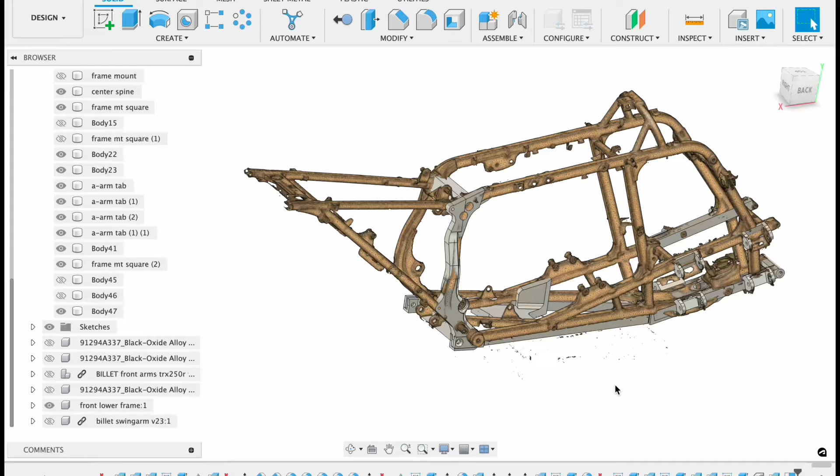In this video, I'm actually going to work on the subframe. I've been thinking about this and deciding what direction I want to go in. You guys saw the billet swing arm in the last video, and I thought it would make sense to work back to front.

So guys, we're gonna drop a subframe. This is gonna be a multi-piece billet and slightly fabricated design. We're gonna have aluminum tubing with billet components that get TIG welded together, so it's gonna be a pretty cool design.

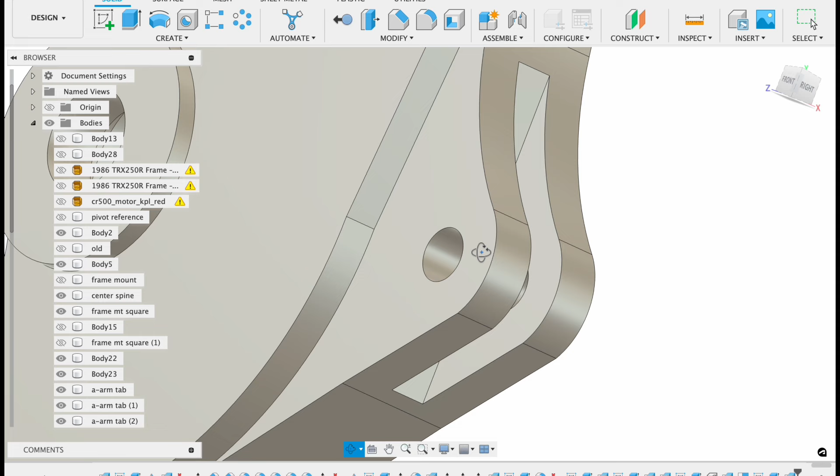My goal here is to have a minimal amount of pieces when we go to do the final welding. So everything is gonna be as much CNC machining as possible in terms of all the fitments and the pieces that intersect the tubing together. I'm pretty excited to start drawing this.

The first step is getting a mounting location on the side of the frame tube. This is what I'm calling the right side frame pivot area of the frame. You guys can see I already went ahead and put a little bit of a slit in there.

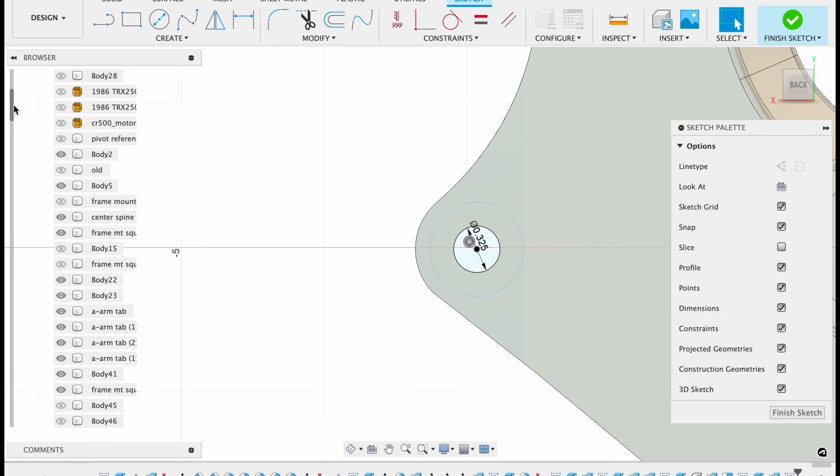Now I'm going to machine that by using a slitting saw. That would typically be a tough feature to machine, but when the part's laid on its side in the mill, I can easily cut that with a slitting saw.

You guys can see I already started sketching on that flat plane, which is inside that mounting area. I'm just going to take the line tool in Fusion and kind of overlay it over the stock frame. I'm going to try to get an angle established.

I want to make a billet piece that would get welded to the end of the subframe. If you guys look at all the modern dirt bike subframes, it's actually genius the way they do it, so it's going to be kind of similar to the way that stuff is made.

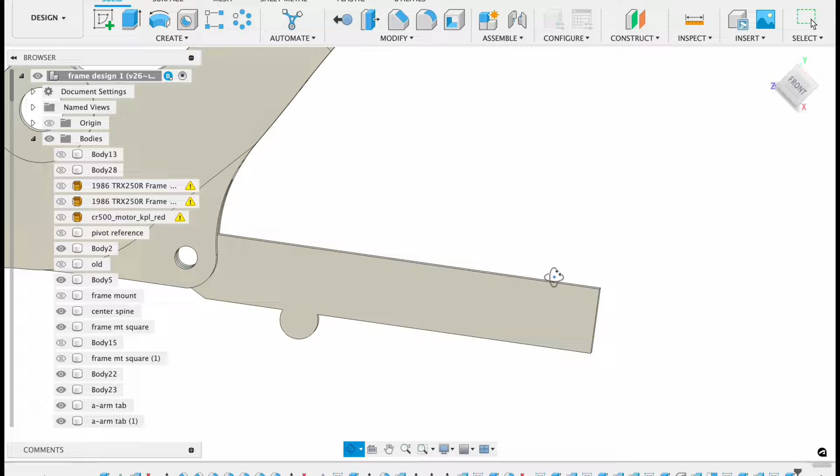If you look that up, you'll see that all the brands pretty much have billet fittings that get welded to an aluminum tube. Now I'm going to take that a step above, and a lot of this subframe is going to be CNC machined. So right here, we've got the mount that's kind of roughed in.

It's just a skinny version of what it's going to be, and you can see I'm pulling that around the frame. I did a little bit of a cutout so it fits into a little bit of a pocket.

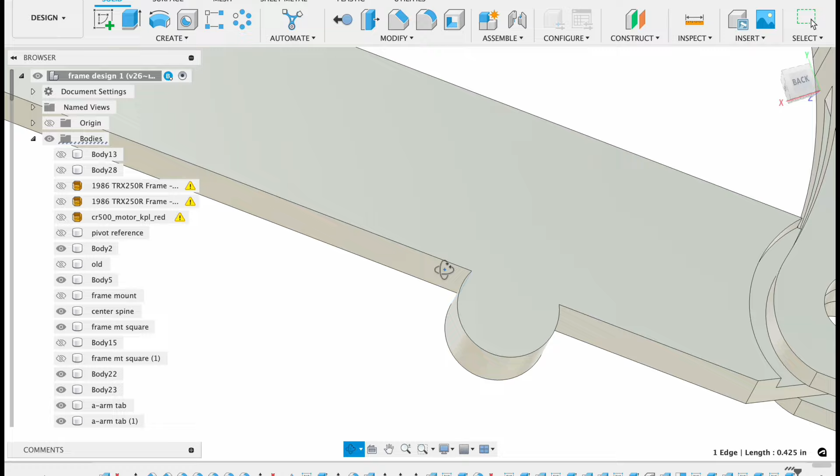Now right here, guys, you can see I'm adding the rear brake master cylinder mount. We're going to have this tab coming off the bottom, and these are going to be 6mm thread, so it's not a super large bracket, but I am going to beef it up a little bit larger in diameter than what the steel piece would have been.

Aluminum is very strong, but you do want to oversize it a little bit versus what the size would be if it was a steel part. So you're going to notice a lot of the fittings are going to appear oversized, and that's just for strength. You really got to think about how you're going to build all your parts.

It's real easy to make them weak, and it's real easy to actually overbuild them. So there's a lot of thought process that goes into all this stuff.

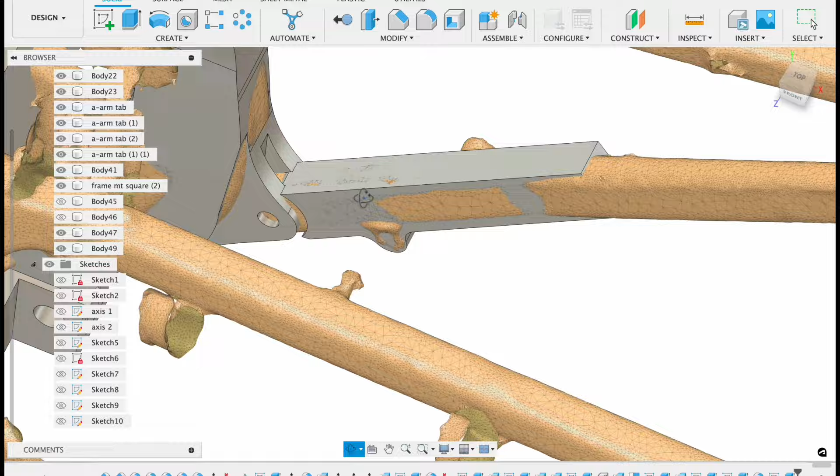You're going to see through this video, I'm going to be changing the designs up quite a bit. And of course, once we do final machining and final testing, there's going to be more and more tweaks that happen with these parts.

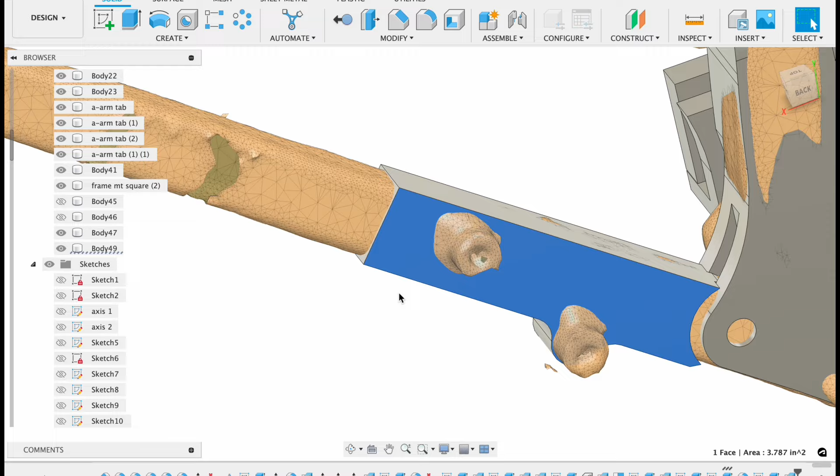All right, so right here, instead of doing bent subframe tubes, I'm actually going to angle the fittings. I'm going to have a little bit of a standoff that comes off the fitting, and the tube is going to slip over it. I'm going to put that part at an angle because I don't want to be bending any of these tubes. I want to keep them as strong as possible.

The less bends we do, the stronger it's going to be. I'm actually planning on offering round tube and square tube. Believe it or not, I actually like the look of the square tubing. It's actually a little bit nicer to set up with the fixtures and all that. I'm excited to experiment with both styles, so you guys are going to see me rocking some square tubing in these designs.

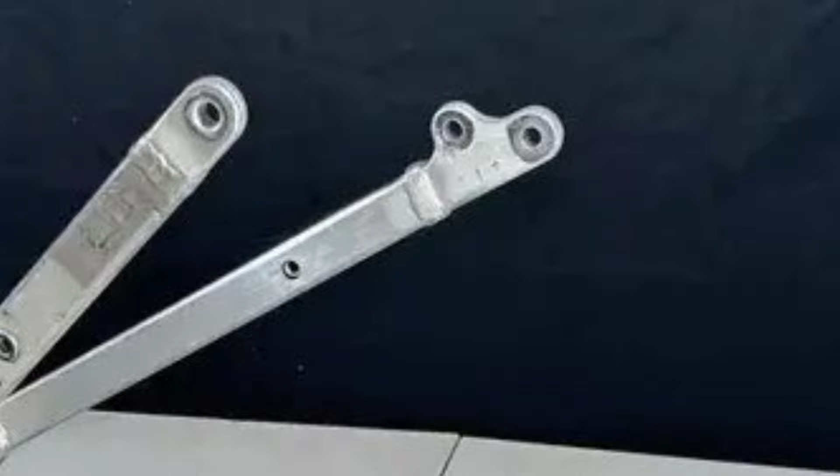Here you can see a Honda CRF450 subframe, a picture I found on eBay. It gives you an idea of what I'm going for with the aluminum fittings that get welded onto some square tubing. I'm inspired by that because a lot of what I do is dirt bike stuff. You guys have seen what we've done over the last handful of years with all the TRX subframes, and I've really been having my hands on all the brand new dirt bikes and new technology in this industry. So we're gonna go with that.

I'm still working on this bracket. I spent way too much time on it, but it's honestly the foundation of the subframe. It's where it mounts to the frame itself, and it's where all the strength is actually going to be.

I'm doing some final tweaks on it. This is stuff I could have probably done at the end, but I just wanted to get a mental visual of the design. Sometimes I get stuck and I'll just start tweaking something until I'm happy with how it looks, and once I feel happy with it, I kind of just move on.

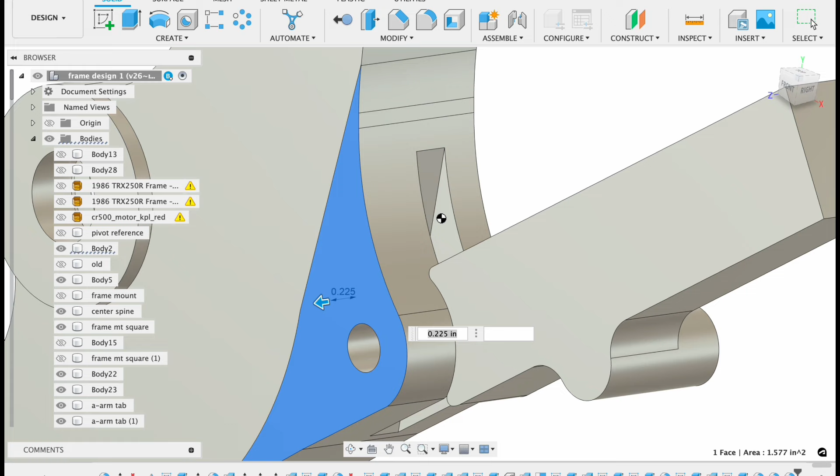I also like to bounce around once in a while. If I start getting stumped on what direction I want to go in, or I have to think about it for a couple hours, I'll sometimes take a break and go back to it. This has been a combination of about a week of on and off the computer as I had extra spare time.

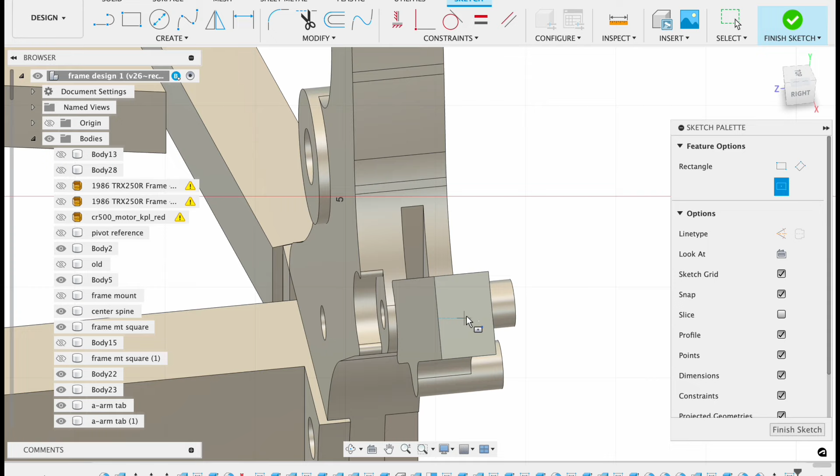But I did spend some time on that day late at night. I was on this computer doodling on this bracket here, so it's pretty fun to do. Like I said, sometimes you just gotta step away from the computer and clear your head and get back to it when you get the idea.

So like I was saying earlier, we have a little bit of a standoff going on this bracket. When you draw in Fusion, sometimes stuff isn't at the correct angle. You're not going to really nail it right away, so it's really trial and error. I set, I believe, a 5-degree angle, and I ended up tweaking it a couple times just to get the tube where I wanted it.

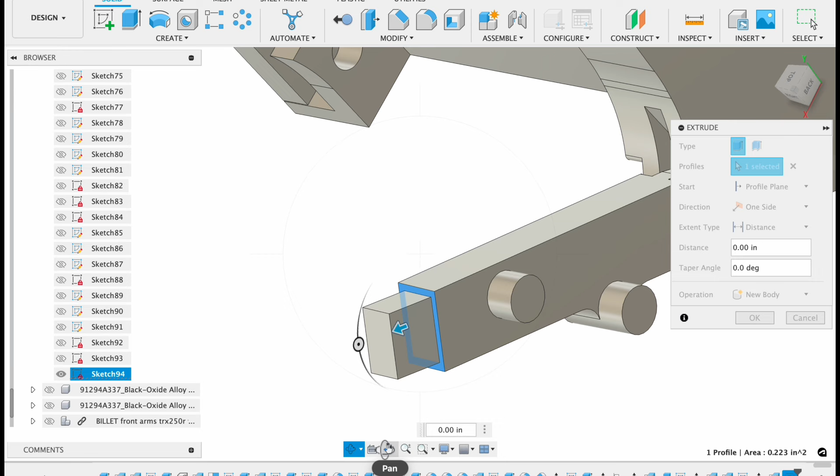I basically just set the angle and then started drawing a tube and dragged it over the OEM frame, and you guys are going to see that coming up here in a second. So there's the start of a tube. Now I just need to actually line the frame up and see how it looks. This was after probably the 3rd or 4th try, so I finally got it.

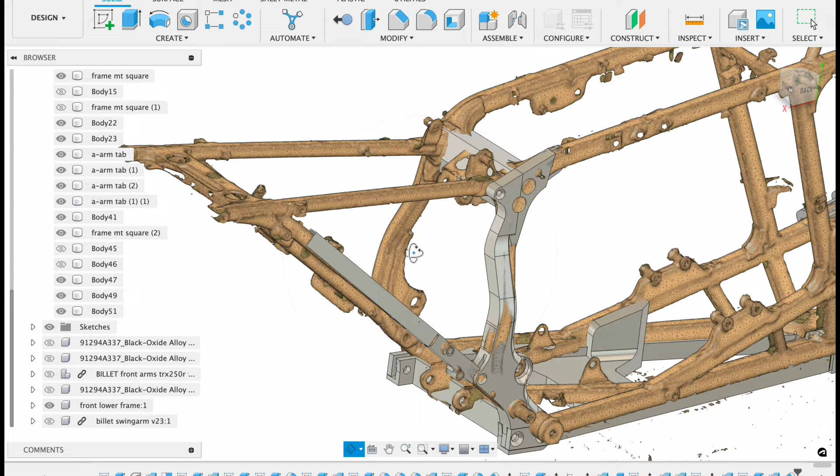It's cool because this image, as you guys are going to see, is going to get mirrored over to the other side. We've got a lot of components and bodies in this drawing, there's also going on almost 200 sketches now, which is pretty freaking wild. But yeah, it's a lot of work, there's a lot of getting stuff to line up. So right there, I'm just doing a mirror of both sides. It's going to give us a pretty cool visual to actually see what it's going to look like.

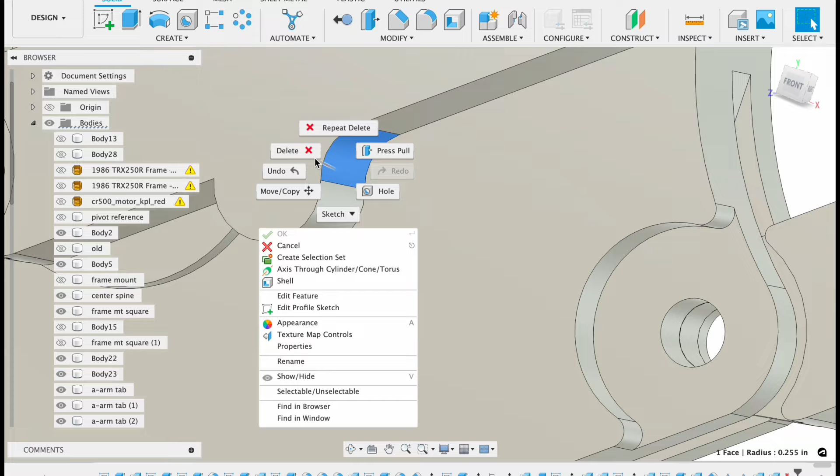It's always nice when you're drawing knowing that you're going to get it lined up on the opposite side, so you only have to do the work once and then do some final tweaks. So instead of redrawing that bracket, I actually just mirrored the lower bracket. Now we're going to remove the brake master cylinder mounts off of that bracket because obviously there isn't one on that side, only on the right side, not the left. So I'm just cleaning that up, removing a couple of features, and now that's a separate body on that side that's ready to go.

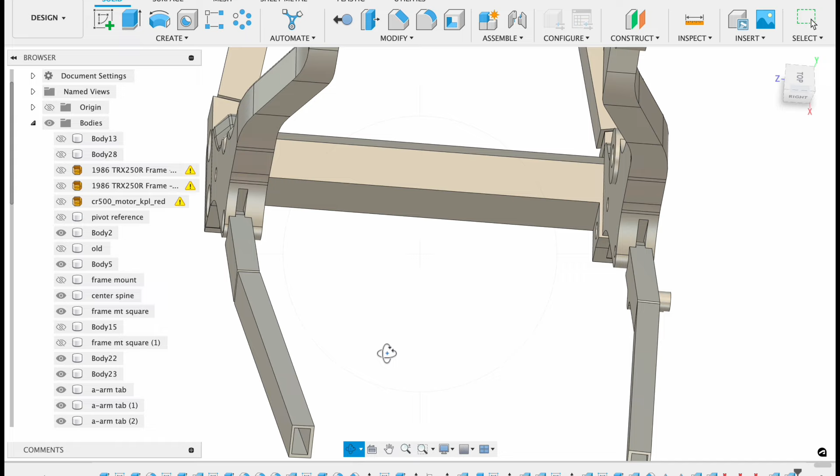Now I decided to actually adjust the frame. I wanted to thicken that back up, and I'm actually going to thread it. Originally I was going to put a nut on there, but I think the threads are going to be just fine. We do a form tap. Our threads are super strong with the way we actually machine them. I haven't ever had any issues with threads pulling on our aluminum parts. We're also going to use high quality hardware, and it's going to be super strong.

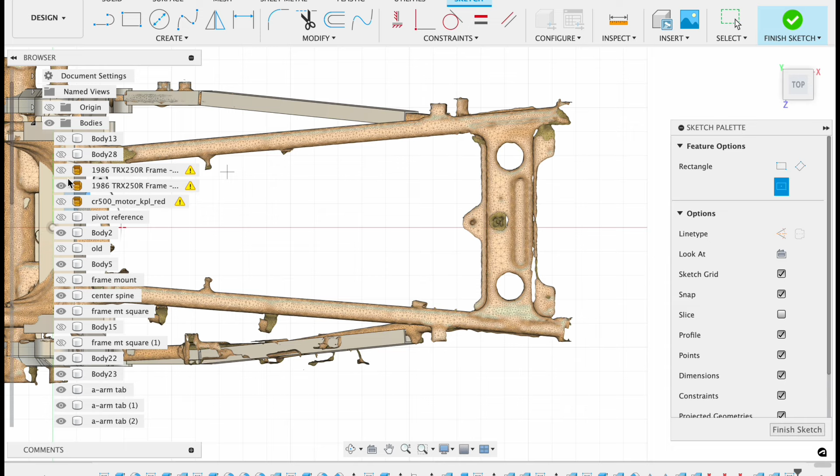It's not good, but I'm just going to get some hole locations, and again, this stuff's all going to be final measured in real life. This scan, I believe, was a 50,000 resolution. I actually left it kind of rough on purpose because if this thing was any larger of a file, I probably would be having issues with my computer. I'm actually doing this on a small Apple laptop, just kind of chilling in my chair at home at night, and it works. It works, guys. It lets me do this at night and do it in my free time without being on the shop computer.

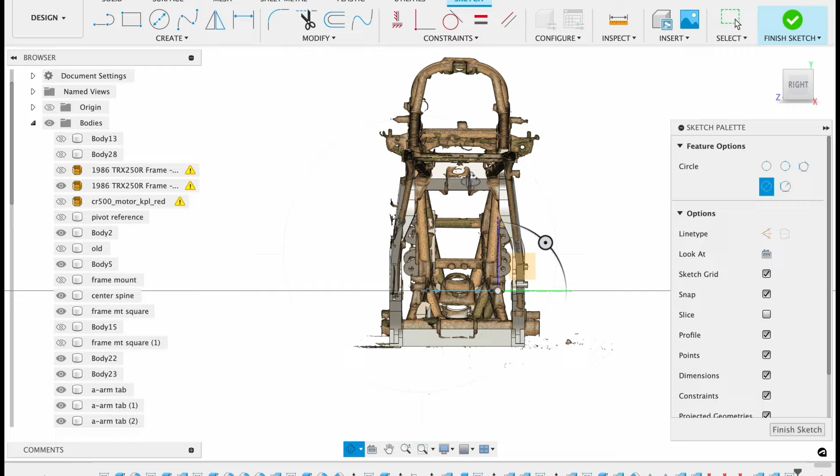So again, the subframe's bent. I can see it. It's pretty awful, kind of funny, but it's okay, we're going to make it work. So as I'm drawing this, it's actually going to look crooked, but just keep in mind we're drawing everything straight and on center in the CAD software, and we actually do have a bent subframe in real life. So I'm going to move that all around so it's perfectly centered to the drawing.

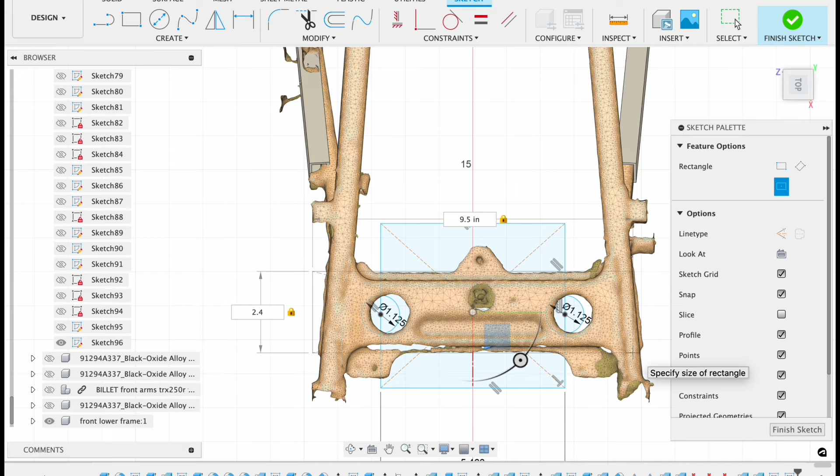So now we're working on the rear plate on the subframe. I'm starting out, I believe, with a 3/4 inch piece, and we're going to tweak it from there. So it doesn't look like much yet. I think I spent almost a couple hours just on that one piece, which was pretty wild.

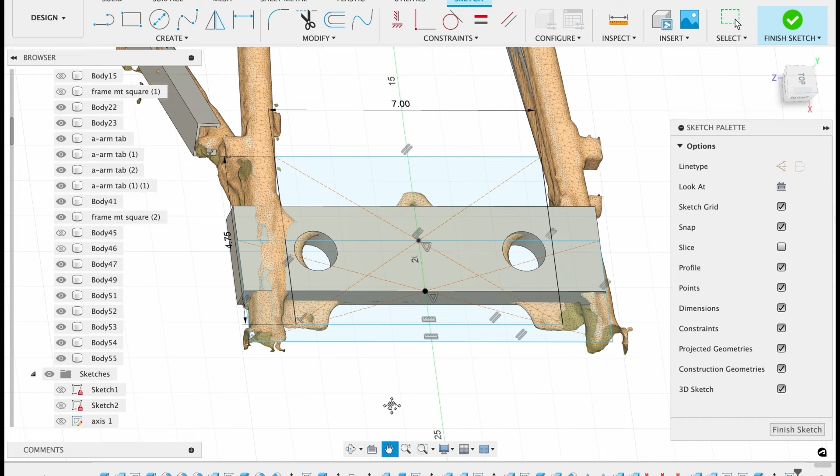And I'm probably not done, so you're going to see me do a bunch of tweaks. Even at the end of this video, you guys might see how this comes out, and then in the next video you might go, oh crap, he made a bunch of changes. I'll try to remember to document some of that stuff if I do tweak anything significant. If it's just small stuff like finishing edges and small little features, I'm probably not going to video all that, or I'll bore you guys to death for hours just talking about it.

But again, the goal here is going to be to have removable brackets. So the airbox tab that you see, that's not actually going to be added on yet in this video, but I will have a removable bracket at the end so that we can do some custom airboxes, everything from maybe an airbox for no-link or an airbox for OEM.

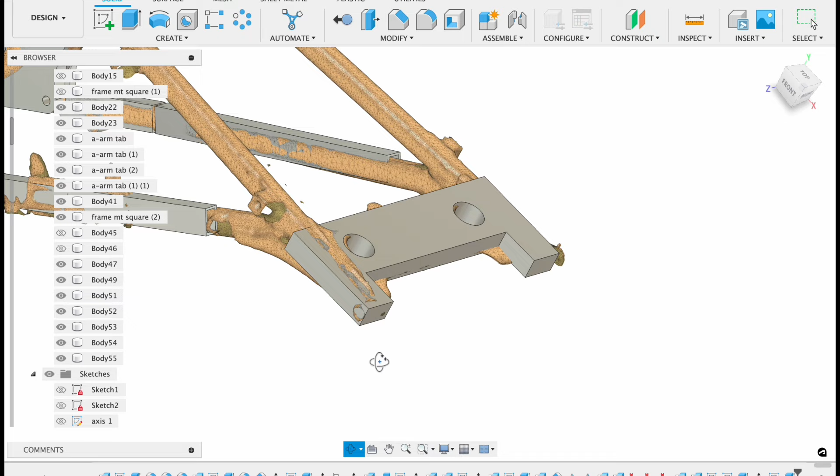I believe this chassis is probably going to end up as a no-link. I had a handful of Lone Star, JRD, and a couple others in the past that had the no-link setup, and it worked really well. I also built one a few years ago for a good customer of mine named Don. He had the Roll Design quad that, believe it or not, made our YouTube channel take off. That was one of the Project 250R series that we did. That was a super fun build.

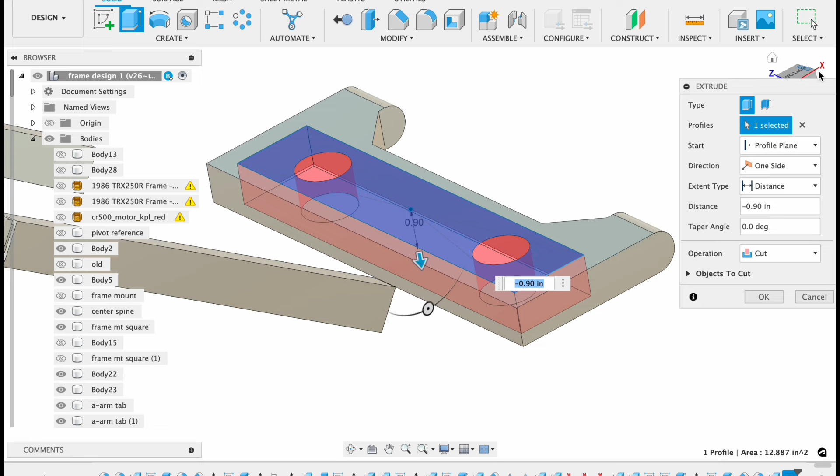He had the stock upper bracket for the shock mount going down to the no-link swing arm, so the shock was a little bit shorter than if the frame would have actually been modified. So the goal here is going to be to bring the shock mount up and back and then run hopefully an 18.5-inch shock. My goal is to actually be about 17.5 to 18.5 inches for the no-link rear shock on this custom frame.

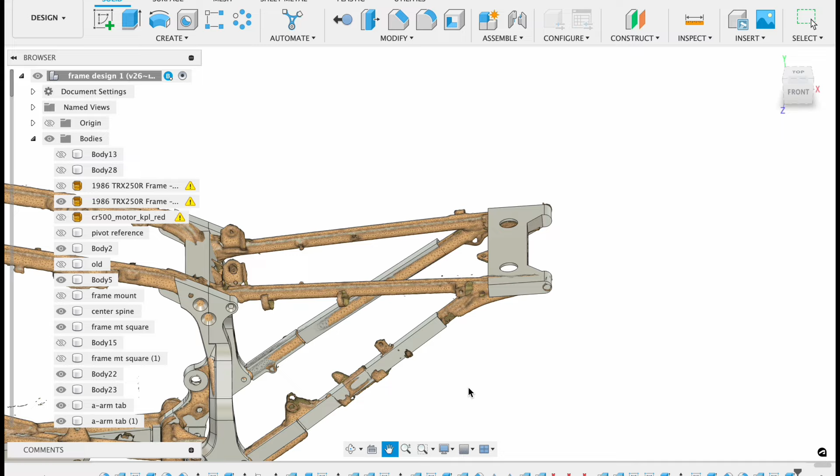So, and again, it's unlimited. If we want to do a stock linkage, we can, but I honestly don't see the point because I've always had them, always tried different ones. We've run the CR500 link, no link, all the modern 450 quads, and yeah, I'm definitely gonna try to go no link on this build.

So yeah, guys, here I am, kind of just staring at this thing, and I'm hitting the old save button because it means I'm getting happy if I start hitting save. Little tip in Fusion: don't trust it. Hit that save button as much as you can.

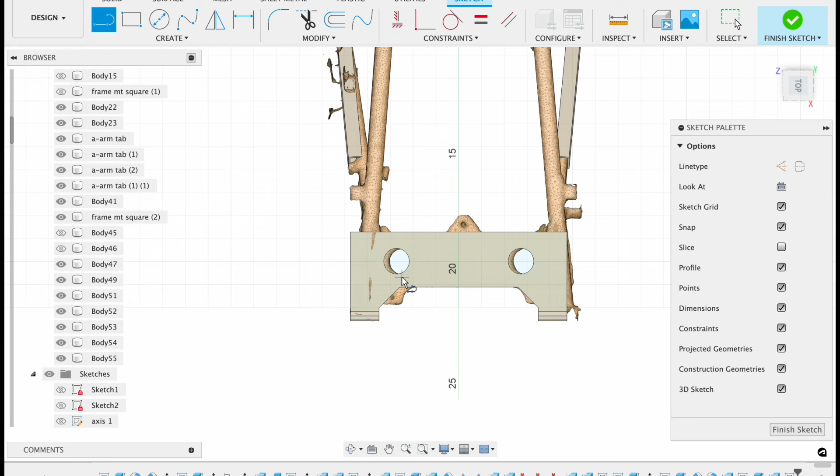If you have a crash on your computer, something freezes up, you might lose your work. Ask me how I know - I've had it happen a handful of times. I've lost hours and hours of work by not hitting save quick enough. Even with a backup file, it doesn't always work - you might go back to it and have half the work done. Same thing goes for drawing, graphics kits, and all that stuff. Any kind of software, this stuff is kind of glitchy.

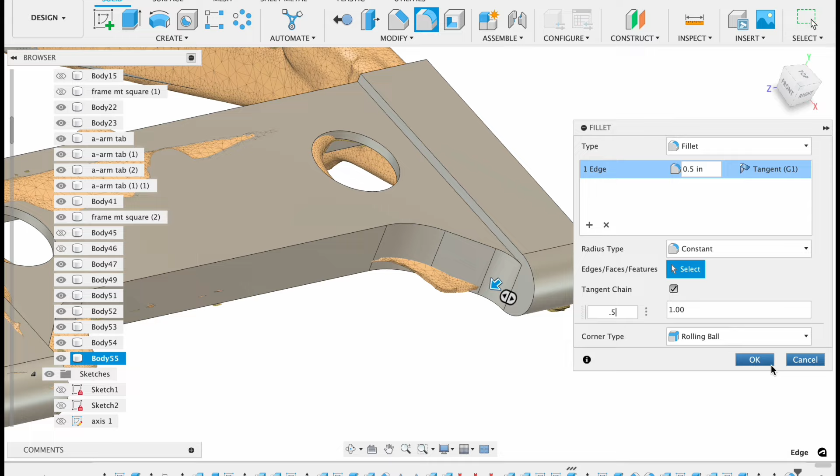I have a CAD computer at work, it's okay. Again, this is being done on an Apple computer. The reason I do that is because I'm actually screen recording on my Apple computer, and I'm transferring the video footage over to my phone and just editing these videos and doing a voiceover. It's simple, it's easy - I don't have a team of people doing any of these videos, it's 100% done by me.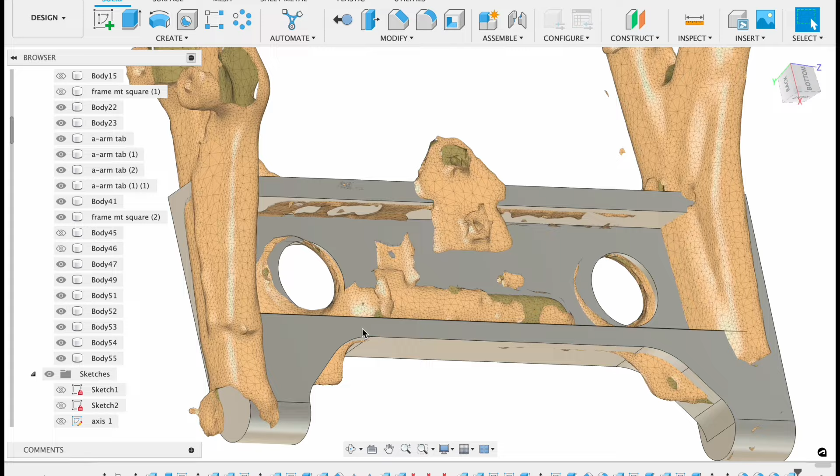My wife does video me from time to time, which is cool. But yeah, guys, a lot of this stuff is just all done in my free time because I love to do it. We don't really make anything off these videos, but I definitely just enjoy showing you guys the process, showing you guys what we do, and not trying to be a cool YouTuber over here - just having fun drawing in CAD and trying to find some like-minded individuals on our channel that actually enjoy watching this stuff. That's what's fun for me.

So yeah, it's wild. But all right, let's get back to talking about what we're drawing here, because I will keep rambling on and on.

So I took the bottom bracket that was connected to the frame and basically just flipped it and reversed it. Now that gave me the opposite angle, so we've got two opposite angles now. I'm basically going to attach that to the back of the frame, and I'm actually going to do this by a series of bodies.

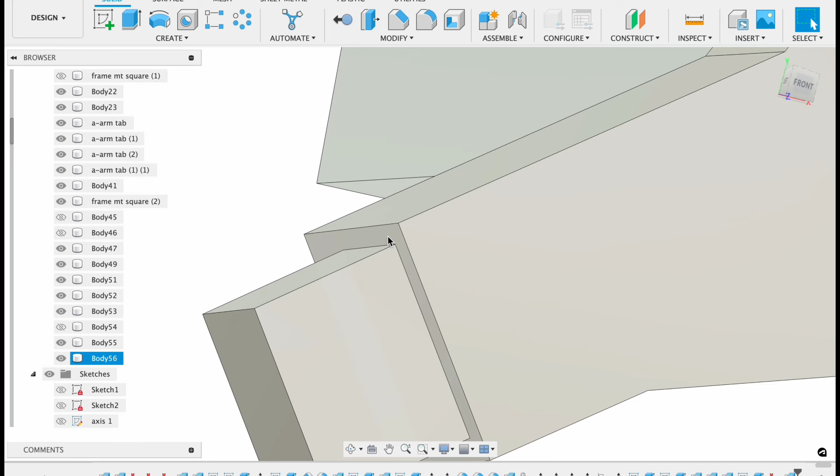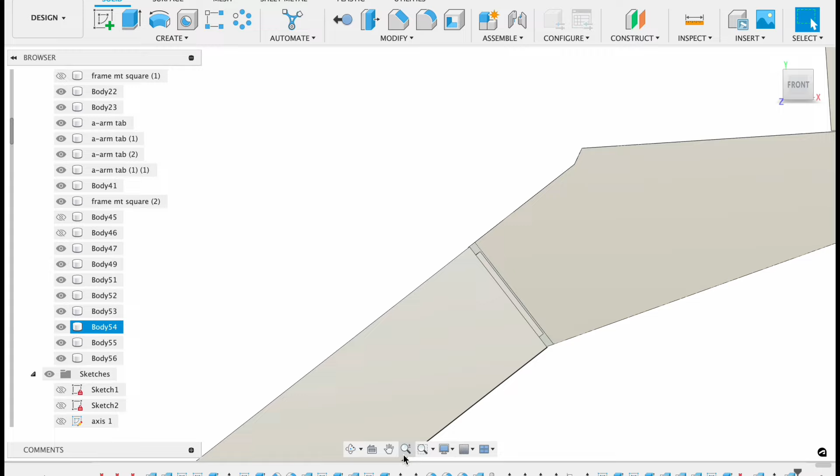Now we're not going to actually put anything together yet - we're just going to have a series of pieces and bodies that are more or less intersecting themselves. Right now they're not intersecting, but you will see me later in this video where I actually pull them to where they will intersect, and then the program lets you technically weld them together. So more or less, we're going to end up with like 3 or 4 pieces, and that whole back section is going to get welded together, which is pretty cool.

And that's how I like to do it, because if I need to make a tweak, it doesn't make sense to try to keep drawing on that part. I like to just draw multiple bodies and make them all solid, and in the end, once I'm happy - because there's just so much tweaking that goes on.

So right here, I'm just turning some bodies off so I can actually see what I'm doing. We're going to start getting those top tubes done. Those ones gave me a little bit of a hard time - it wasn't too bad, but at the end of the day, it's no different than the bottom ones. I just had to kind of rethink how I was going to do it and figure it out on the fly.

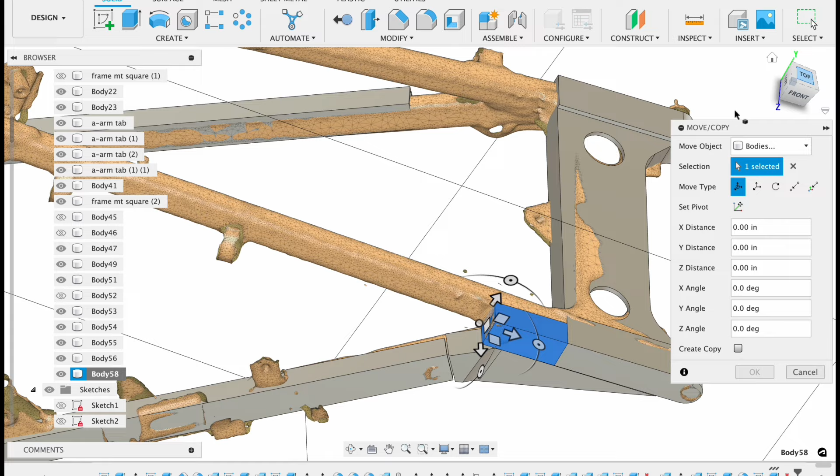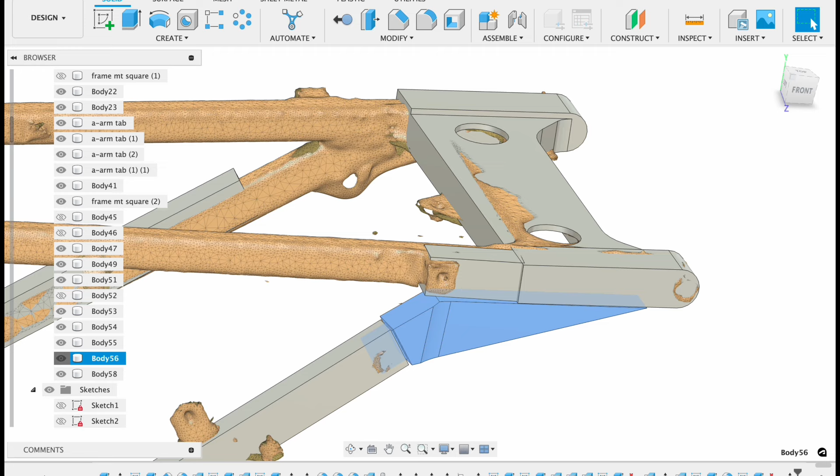Same deal, guys - we're going to have that extra body on there. You can see how it's just free floating, so that lets me get it where I want it, and it's a little bit easier to draw that way. Same exact deal: we're going to have a standoff that comes off, it's going to slip inside the aluminum tube. We're going to definitely leave gaps and all that stuff when we go to final weld it, so the weld has good penetration and will actually hit the base material and lock into the tube. But yeah, not bad at all.

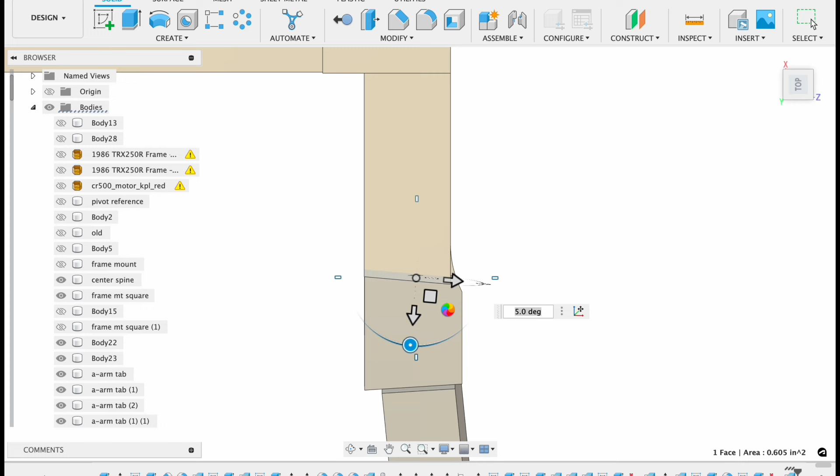Now, it's kind of funny, I guess, the response you guys have been giving me. I've actually had a ton of positive feedback. I've had guys email and say, hey, I do this kind of stuff too, and that's been pretty cool. Definitely love hearing from you guys.

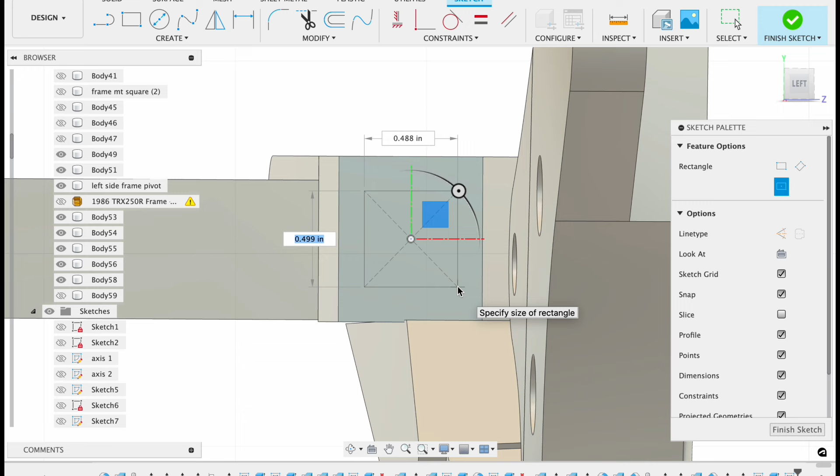And yeah, it's pretty cool to see the response we've been getting. I've also had a lot of guys ask me if we're going to be selling these frames. It's a possibility for sure. Right now, guys, just keep in mind this is just a dream frame that I'm drawing up. I definitely am going to be producing it for sure. Would I love to make a pile of them? Absolutely.

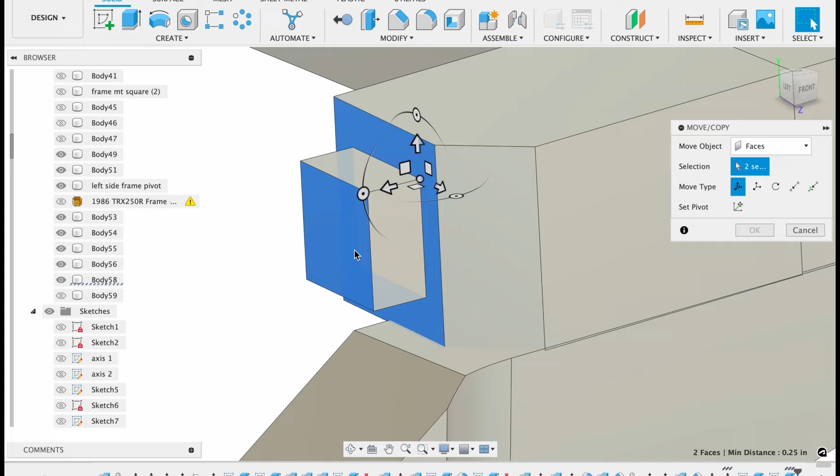I don't necessarily want to bury myself with the pre-order game. We've done that in the past with the TRX stuff. It's not fun having a 6 month to a year lead time. And like I said in a couple videos ago, it's not uncommon for frames to take a handful of years from some suppliers. There's still guys that make them today and they're a little bit quicker, but if you want a legit one, it's going to take time. It's unreal the amount of work that goes into these.

So that's why I'm kind of stepping up and just trying to challenge myself and try something different. I've studied the way a lot of these big name manufacturers are making their bikes. I've worked on a lot of the new stuff, and it's just inspired the heck out of me to bring this to the ATV industry. So yeah, I guess to answer that question, I would love to produce these.

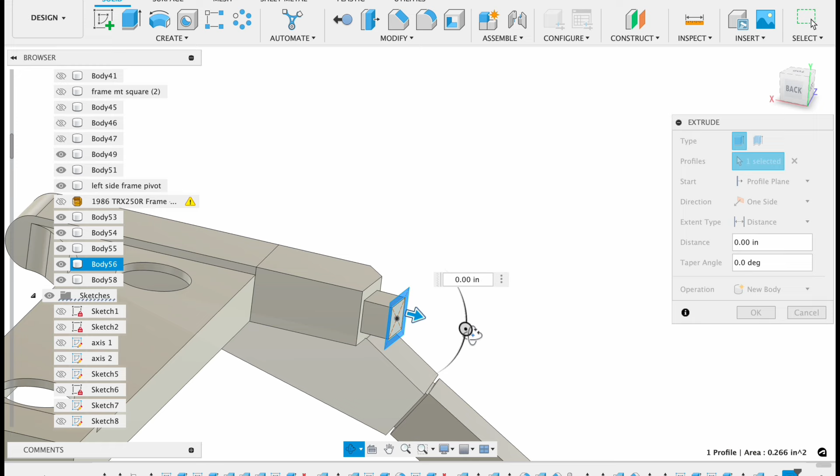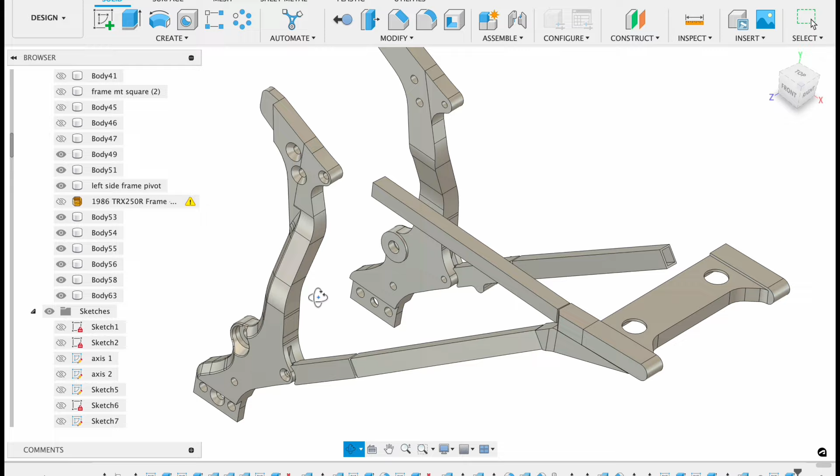To be real with you guys, I'm super busy with the big wheel stuff right now, but I've always been an ATV guy. If you guys go back to some of my oldest videos on this channel, you're gonna see that I'm a quad guy. I grew up riding three-wheelers, quads, transitioned to dirt bikes. I spent hours of my life on all of them, but most of my riding was done on ATVs, and hours and hours on a 250R. I pretty much learned how to ride motocross on a 250R, and yeah, it's a love of mine.

It's something I think about. If I'm having a bad day, I think back to riding 250R. I think back to the old days of ripping the motocross track back in New York. Yeah, it's crazy how much times have changed and the world has changed and things are just different now.

So doing this and getting back into the quad products and kind of doing what inspired me when I was young to get into manufacturing, that might actually have a little bit of fulfillment for me. Yeah, and again, just seeing you guys get excited about it's pretty exciting.

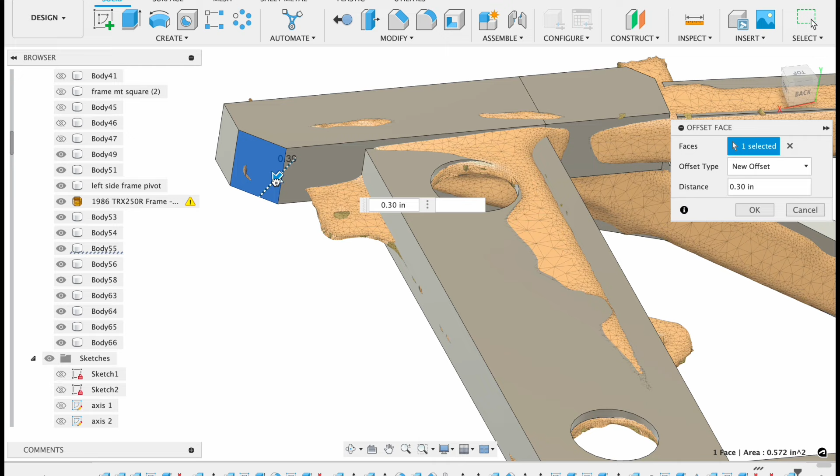I don't know if a lot of you guys do know, I might have mentioned it. I originally owned rcentral.net, which turned into TRX250R.net. I started that website when I was in my teenage years, and then I sold it when my business started to take off. I believe when I was around 21, I sold the website. Guys, I'm 37 now, so that was many years ago. But again, lots of cool guys on there that I met in the 250R industry.

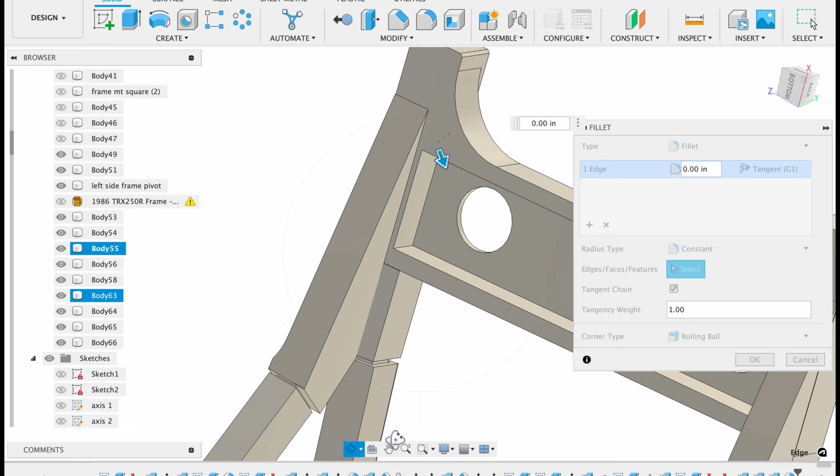It's something I love, you know, and hopefully we can take all the skill, all the equipment, and all the knowledge we've gained in the last like 10 years doing this manufacturing stuff, and hopefully put it into the quad industry now and bring out some cool products and just have some fun with it.

Let's be real, it's been kind of boring. Everything's been kind of repetitive, it's been the same. I don't really see it going anywhere. Quads have kind of died off, and it kind of breaks my heart to see nobody making quads. I mean, I love the YFZ 450R, it's cool that they make it, but there's nothing like a 250R. There's nothing like a hybrid 250R build. These things are just unfreaking believable.

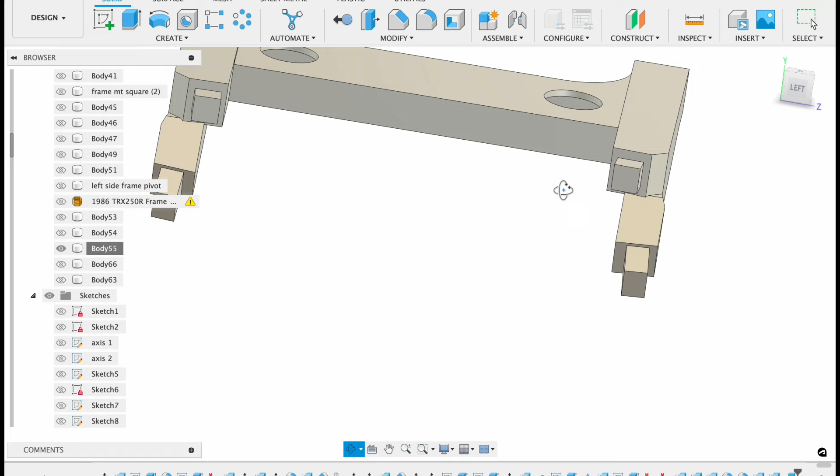Coming up in the future, we do have an electric 250R quad build that's going to be coming. That's going to be TRX250R or TRX450R chassis based with a KTM Freeride motor. That's going to be pretty damn cool. The only problem is they're not super fast, but it is what it is.

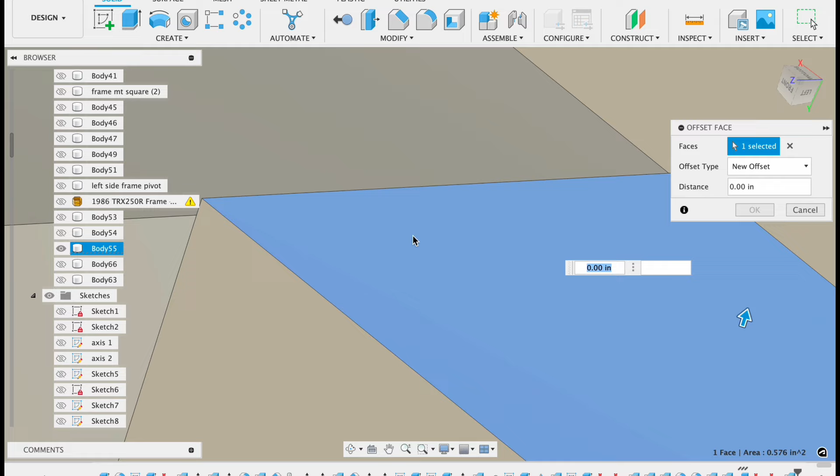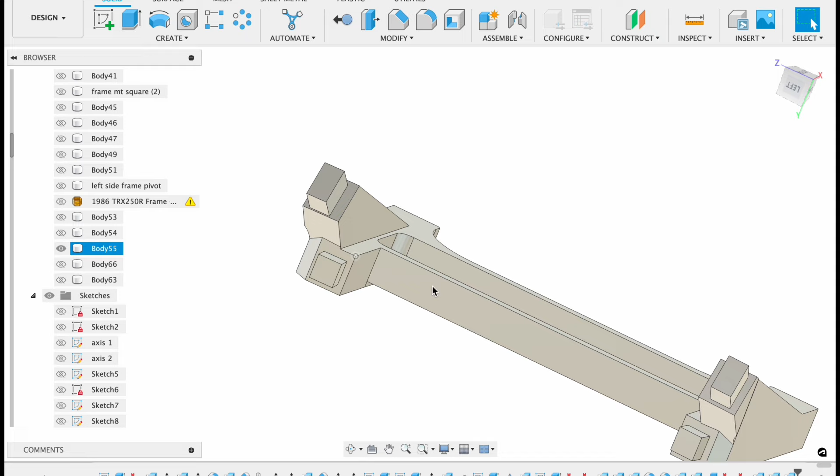We could do something like the Stark, like Walsh is doing, which I'm super pumped to see him doing. I've actually got a handful of big wheel customers that want me to do some big wheel kits on those, so I think that will be pretty cool. But as much as I'd love to build an 80 horsepower electric quad, I think once I do the KTM, that might just be it, and we're going to focus on the 250R stuff. My ultimate goal is to bring back the 250R stuff, do as much as I can to support that part of the industry.

I think it deserves to keep going as many years as it can. I don't want to see quads go away. I think they're actually going to come back. I have that weird kind of sense where I look at an industry and I can kind of feel it, because I've been in and out of it so many times and I've just kind of seen it, you know. I started my shop back in 2006.

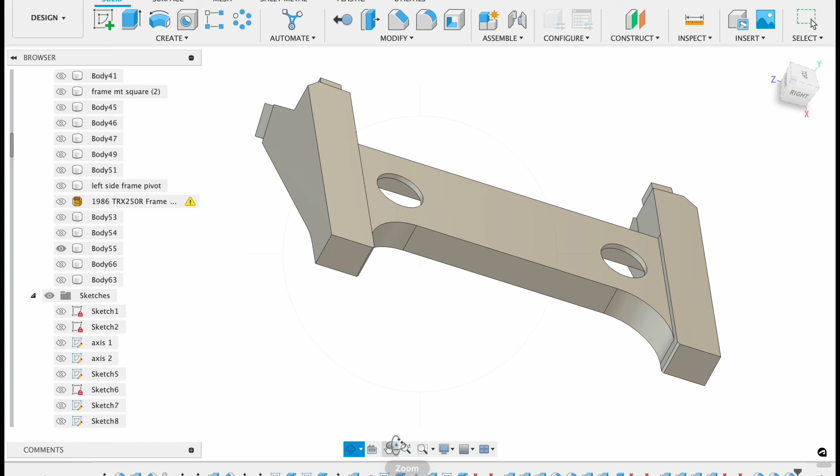I was 18 years old. I worked at a Harley dealership out of high school before that, and I can't tell you the waves I've seen in this industry of ups and downs, hard times and easy times. We're kind of going through a winter right now, in my opinion, with the way the economy is and everything. We might be busy, but with inflation, you kind of scratch your head a lot and go, why am I doing this? So if I'm gonna bust my ass every day and deal with all the stresses of a business, I better be making parts that actually speak to my soul.

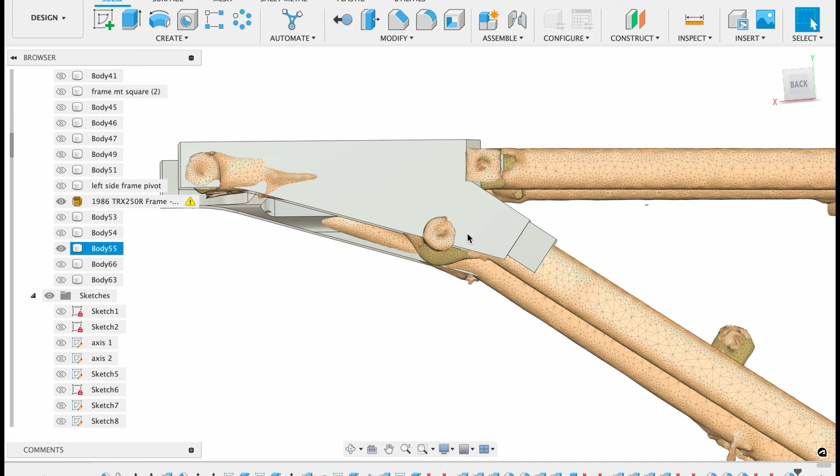I think you guys are gonna see a different side of me coming out with the quad stuff, just because it's something that I grew up doing. It's something that's been on my mind. I'm hoping that I can nudge it forward a little bit with some new ideas. Not trying to ruffle any feathers with anybody that's been building frames or parts. I'm busy with all the other stuff that we do, but this is something I just genuinely enjoy. I'm gonna use every ounce of my power to build you guys some badass parts, and whether we produce them production or not, whether guys want to order them or not, it's cool. I'm just gonna have fun with all this stuff and keep going.

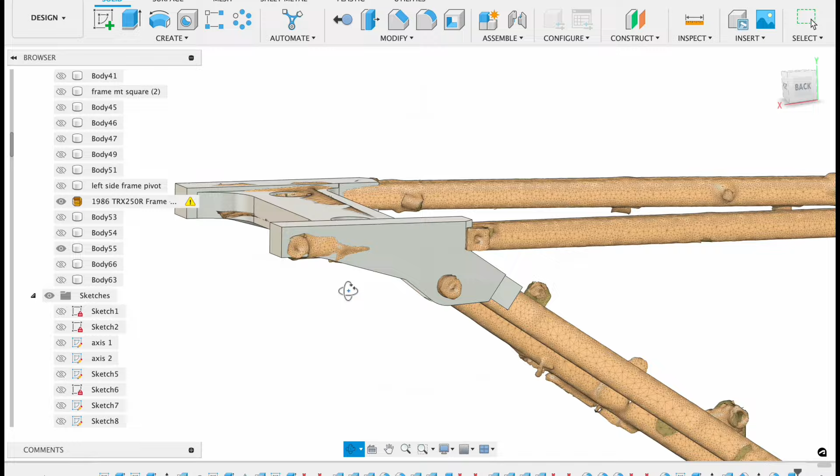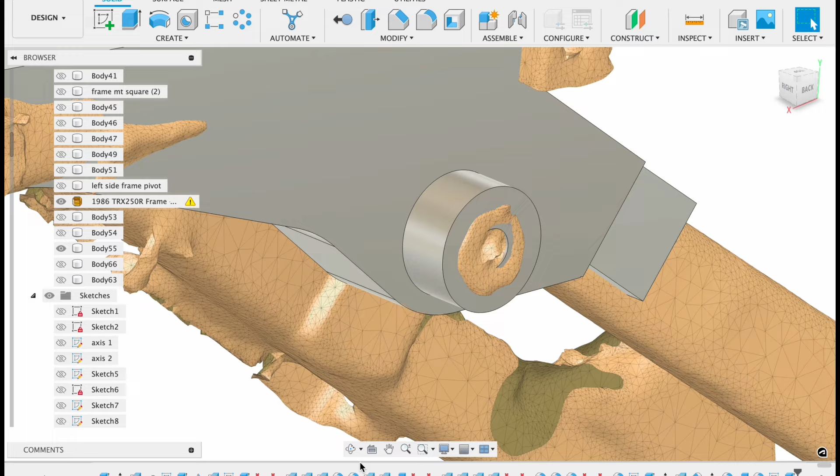All right guys, storytelling's over for a minute, let's jump back into this frame here. If you've been paying attention, you can see how much work I've been putting on this rear section. I'm right down to doing the exhaust threads right now. This will be an 8mm thread, and I'm doing a little bit of a standoff for that. That's where the exhaust silencer is going to be mounting to the subframe. I still have to do the lower one, but we're going to worry about that in another video. I might do a replaceable clamp-on billet style one, not sure yet. I like having stuff be replaceable, and I think it looks cool too.

You're going to notice I squared off the back of the frame from the original design. I've just been kind of making tweaks as I go, and we're going to do some standoffs on each side here. I believe we come out about 250, or a quarter inch, I can't remember. You can maybe see what was on this video here - keep in mind, I did this, I think it was, yeah, it looks like a quarter inch. I did this about yesterday, and I finished up this video today.

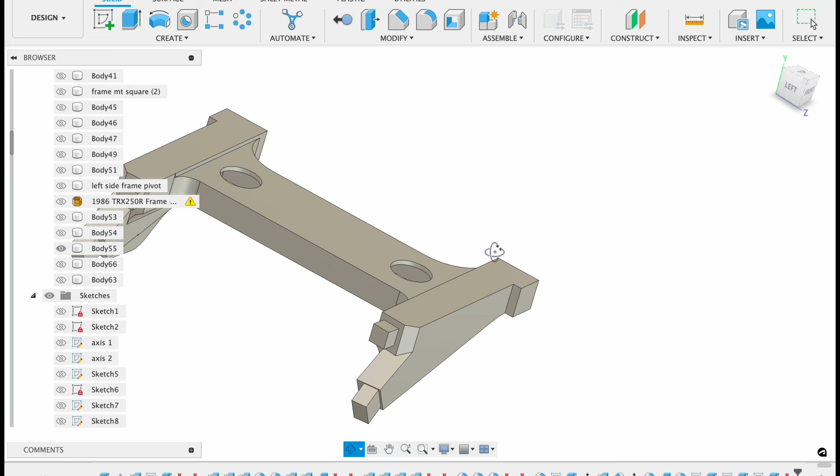Yeah, so guys, that piece right there, that's it. That's what we're going to machine. So you can see I'm doing some finish work, some corner rounding and blending, just cleaning it up. It kind of acts like where a weld would be in a way, just a nice little fillet. Got some nice fillets underneath.

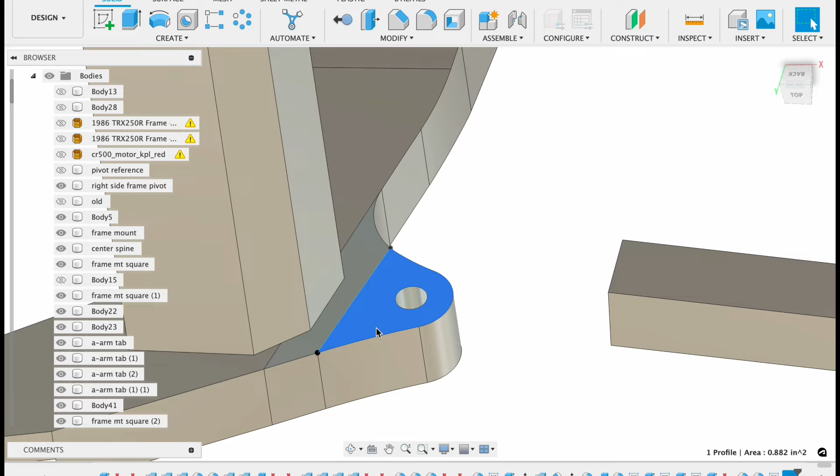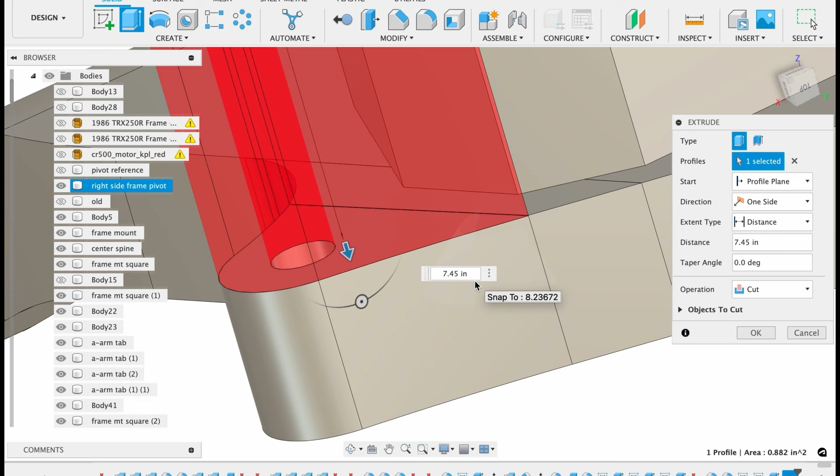So now it's time to get those front brackets done. We've got the back looking pretty good, I'm excited about it. Sometimes in Fusion it's easier to just drag your body over and do a cut operation. I know the dimensions, so I'm going to add 200 to the value and get that measurement out of there - basically cut it out.

I'm just double checking my math, looks like I was right. So yeah, we've got a nice billet back piece. We've got the two lower brackets, the two tubes, the back piece, the two upper tubes, and the two front pieces - that's really not a lot. If we were to fabricate this, there'd probably be 20 or 30 pieces actually welded together, needing gussets and all that stuff. So it's pretty cool to simplify it as much as possible.

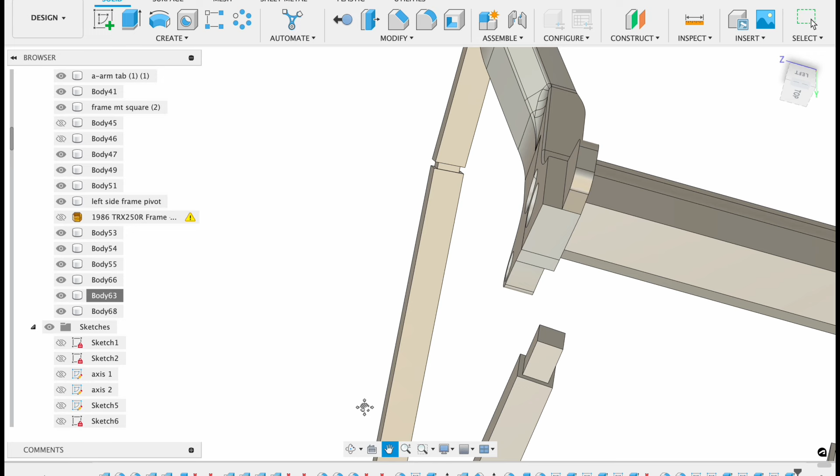Now, I could have made this subframe a bolt-together design, but honestly for production or just time, it's way better to just weld the pieces together. Again, we're going off what the professionals do - the big name companies that produce thousands of motorcycles every year - and we're doing it small scale and super niche, in the 250R market.

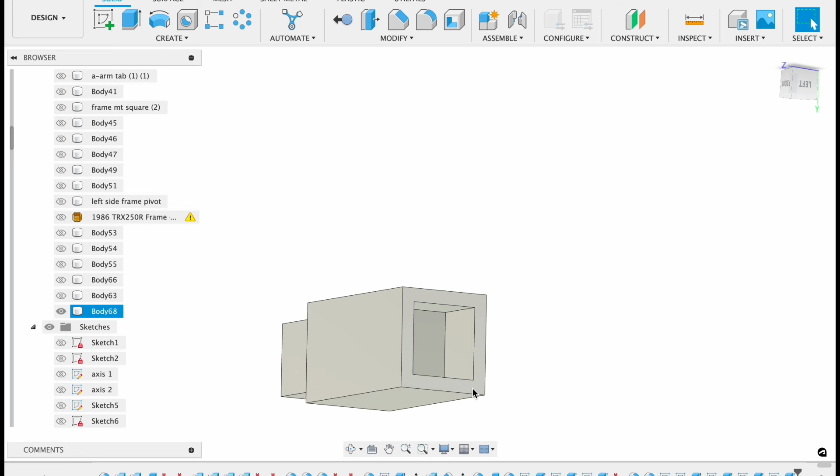So again, I'm just getting a bracket drawn up for the front. We've got to figure out our angle. You can see that's actually going the wrong direction right now, so we're going to flip that, re-angle it, and then draw a sketch off the front of that face.

So right here you can see I'm doing some tweaking. We're at 94 degrees, we need to tweak that about 4 degrees to get it completely square with the frame bracket.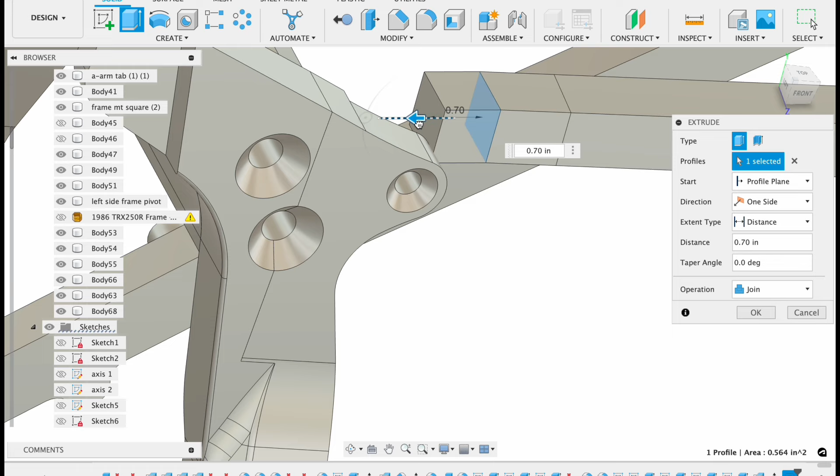I think I hit the save button - nope, it was just loading. All right, so basically I drew a sketch and we're going to draw this tube out. We're basically going to put a bung on the frame, which is just going to be a circle with a hole in it. That's going to be the threaded portion of the subframe. So I'm going to draw that on the inside of that plane.

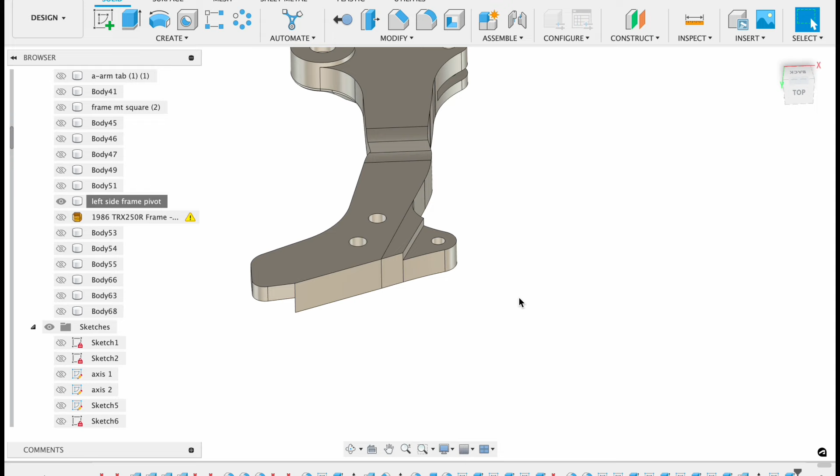And again, we're just going to make another body. We're not going to overthink this and get too fancy here. So more or less, you make another body, get it where you want it, and we're going to intersect it with that other tube, and then actually technically weld them together in the program, and that's going to become one piece once I'm happy with it.

Now I like to actually pull the other part back up, and as I'm press pulling, I just click the plane that I'm trying to go to instead of guessing, and it'll just line it right up. You can see how I just click that, and there it is. So I'm going to pull that back about halfway, roughly, a little bit past halfway.

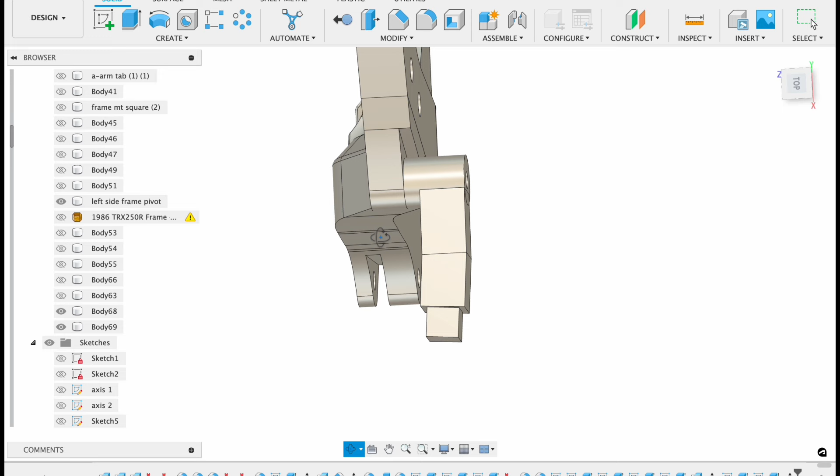And yeah, it don't look good, but we're gonna fix that. It's too easy to overthink this drawing stuff. There's probably better ways to do it than I'm ever gonna show you.

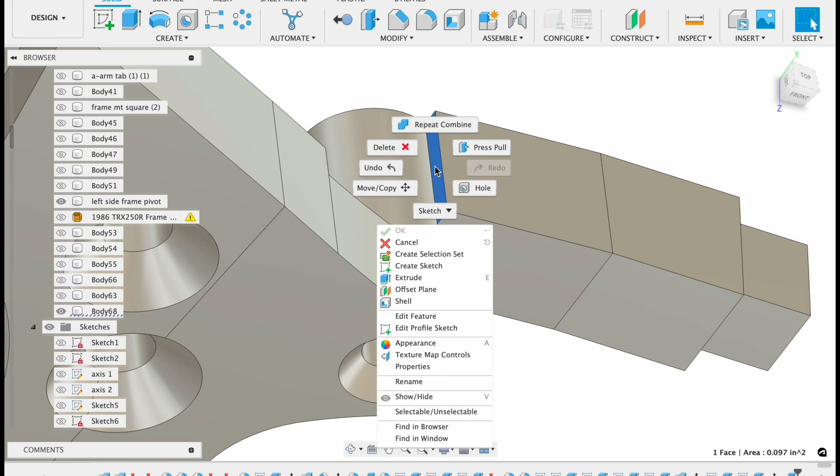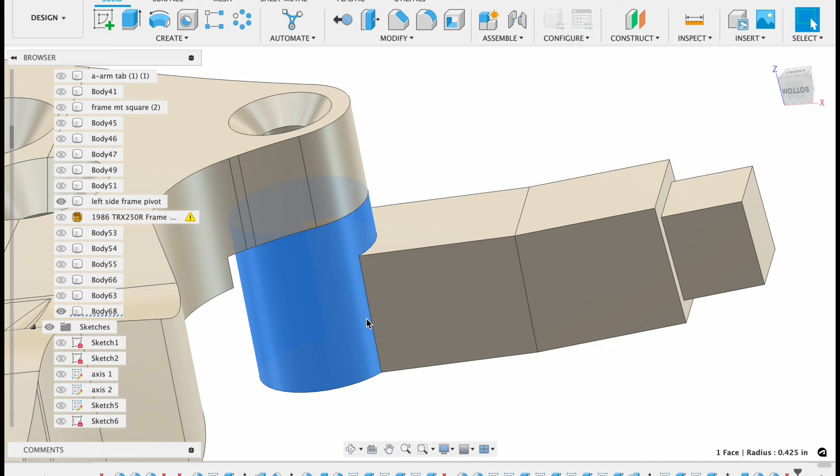I'm self-taught. I generally go pretty quick, I feel, but I also have this stuff in my head. So a lot of this is 100% just going off a mesh, coming out of my head, and designing on the fly. And like I said, if you've got to take a break and think about it, it is what it is. But once I see something coming together, I almost get an adrenaline rush, to be real. I see it coming together and I get excited, and I actually can't get off the computer at that point. That's when I fry my brain cells all night, just sitting there staring at the screen, and you tell yourself, hey, you got to get your ass to bed so you can be useful in the morning. But again, this drawing stuff is slightly addicting when you can draw whatever the heck you want.

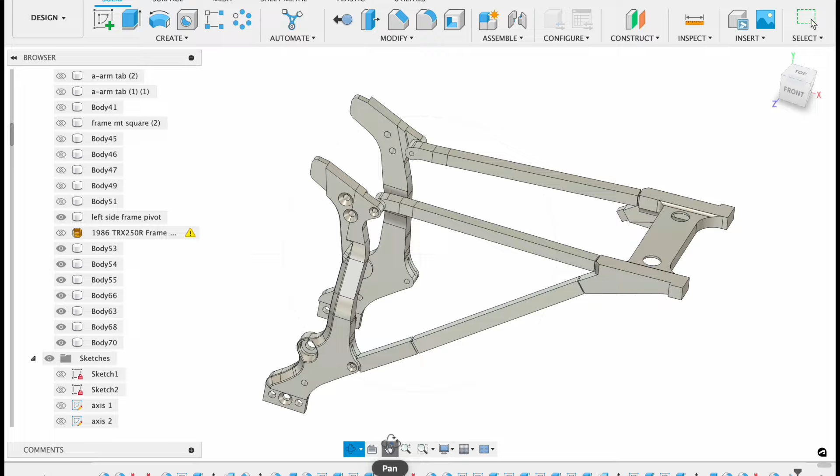But for right now, I'm happy with how this thing's looking. So more or less, my next step, guys, is gonna be mirroring this bracket over to the other side. There it is. And we're gonna spin this bad boy around, and I'll probably spin this thing a few hundred times and just keep staring at it and see if I'm happy with it. It's really not looking too bad.

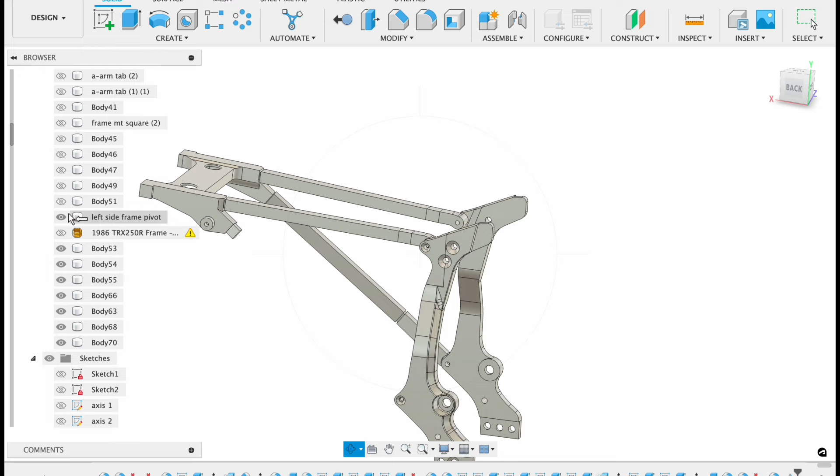Now, those front seat brackets, God, those things are awful. They always bend. I usually weld a rod in there. I've got to come up with a cool solution, because the way I want to do the no-link setup, it's actually going to be kind of raised up in the center.

So here's my thought. Just dealing with these quads for years, and always buying them with bent seat brackets in the front, I'm thinking we make them bolt-on. So I think they're going to be bolt-on on each side. So those front fittings are going to have like a 6mm thread on them, and we're going to actually have those pieces be replaceable, because there's nothing worse than having bent seat brackets on your frame.

The rubber grommets, they always get a little bit chewed up, so I might even try to come up with maybe a new plate. If you guys are a 250R guy, you're gonna know what I'm talking about. So there's a plate on the bottom of the seat that actually gets bolted to the seat, holds the plastic, actually gets slipped onto those two bent brackets that I was just showing you guys, and there's two rubber bushings.

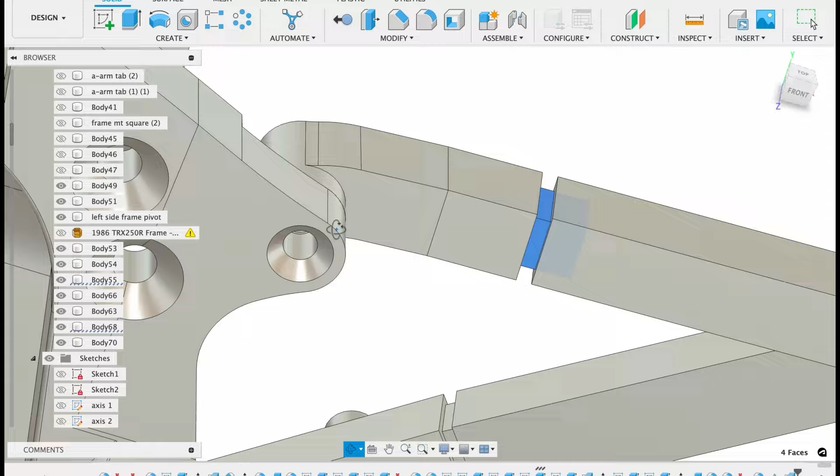Now, what happens is that plate gets mangled, and then once that's mangled, your seat's kind of flopping around on top of the gas tank, and then your tabs usually bend. So not fun, but we're gonna try to come up with solutions for all this stuff, and again, just bring this quad into 2024 standards, because it's just not there.

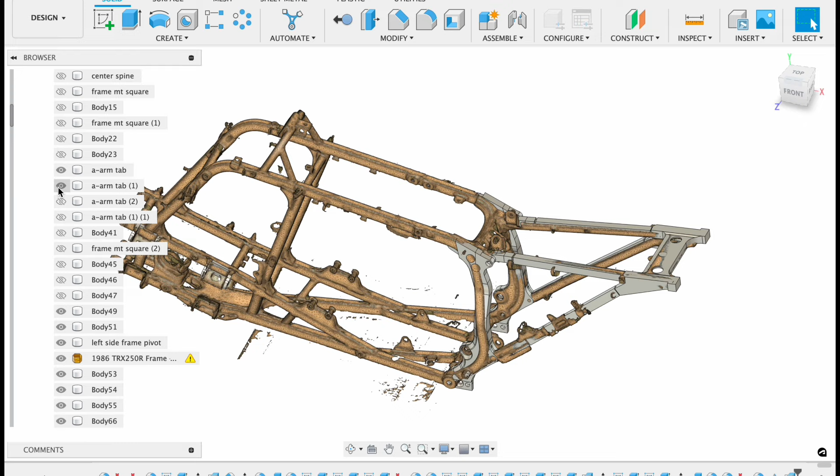But yeah, I'm super pumped with this subframe. It's looking really cool. I think it was harder to draw than the rest of it, which is kind of funny. The swing arm actually sucked really bad to draw too, but I generally sometimes pick the hardest crap at first and just go for it, because why not? Believe it or not, that A arm was easier to draw than the subframe, so kind of funny.

But yeah, guys, there it is. I'm pumped on it. Starting to lose my voice because I've been talking this whole time. I don't have a drink on me, which is kind of funny. I'm sitting in our little office at home where it's quiet, so you guys don't hear my dogs running around in the background.

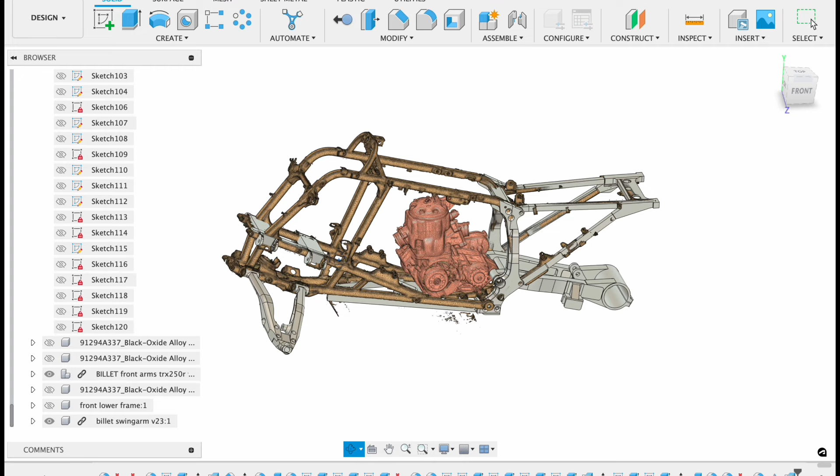But yeah, so there's those bent brackets. They're just bent. That subframe's bent. Nothing's really straight on this. It's just giving me a really good reference point to, number one, draw off of. Number two, I can take my good frame and measure it in real life, and if I have to scan parts of that in, I will. But this thing, it's looking pretty damn dialed, and I'm pumped on it.